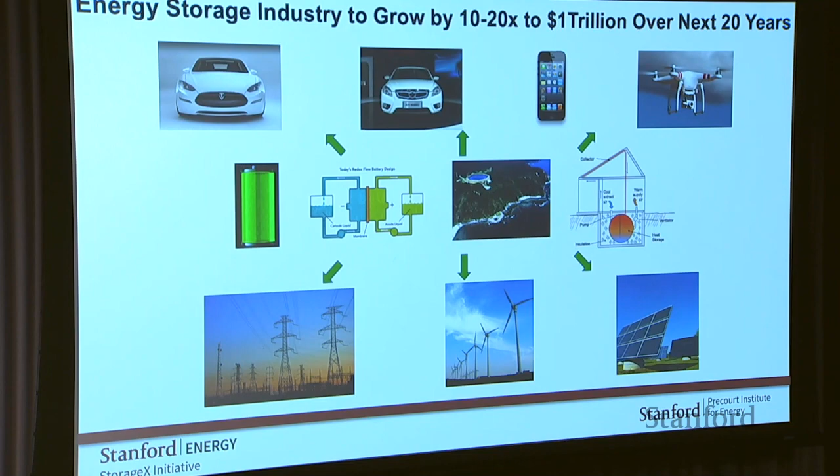And I think the audience hopefully does not require an introduction to the urgency of the energy challenge, but perhaps what is not realized is that there is an enormous growth needed in the area of energy storage. So we're now reaching an era where renewable electricity can be generated that is competitive with conventional electricity, but it is not available all the time and everywhere that is needed. To resolve this issue, you have to tackle storage.

The application of energy storage goes far beyond that of the electricity grid. It goes into transportation, and it goes far beyond that of just conventional automobile transportation, but into electric flights and other exciting applications. And this slide is just to show you all the possible use cases that can be enabled by affordable energy storage.

There are many form factors of energy storage. We won't get into too much detail today. There are small batteries, there are big batteries, there are energy storage options beyond battery. And this is really the X in StorageX, is to look at all possible scenarios that will get us to an energy storage option that can make a decarbonized energy system competitive.

Unless you've been living under a rock, maybe some of you have, you would have heard that the Nobel Prize in Chemistry last year was awarded on the topic of lithium-ion batteries, awarded to John Goodenough, Stan Whittingham, and Akira Yoshino for their invention of the lithium-ion battery technology some 30 years ago. And this, in the word of the Nobel Prize Committee, is a gift to humanity. I think this is really not an understatement. If you look across this room, the number of lithium-ion batteries probably will be well in the hundreds. And our life today would not be possible without it.

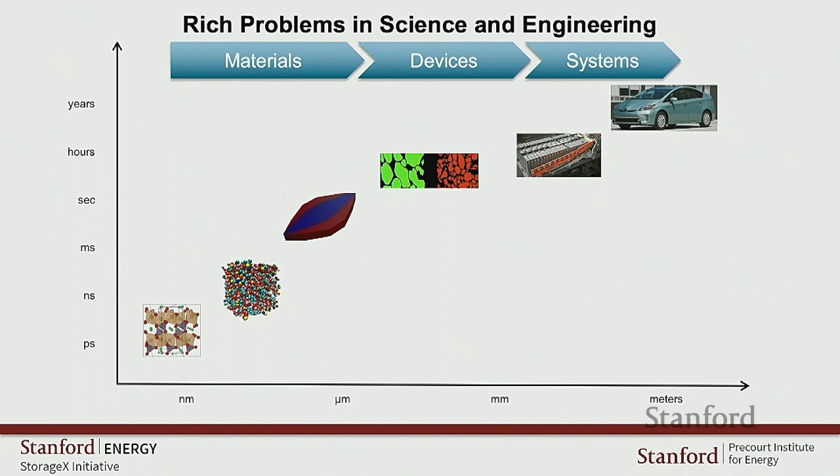We've been tackling this from the synthesis, the fabrication, the characterization, the modeling, the analytics. So this is giving us the ability to look at the problem more holistically. And this is really how the idea of the initiative came about. It was, well, how do we now take it to the next level to span the science and engineering from the materials to the devices and then ultimately to the systems level, whereby we can make the largest impact.

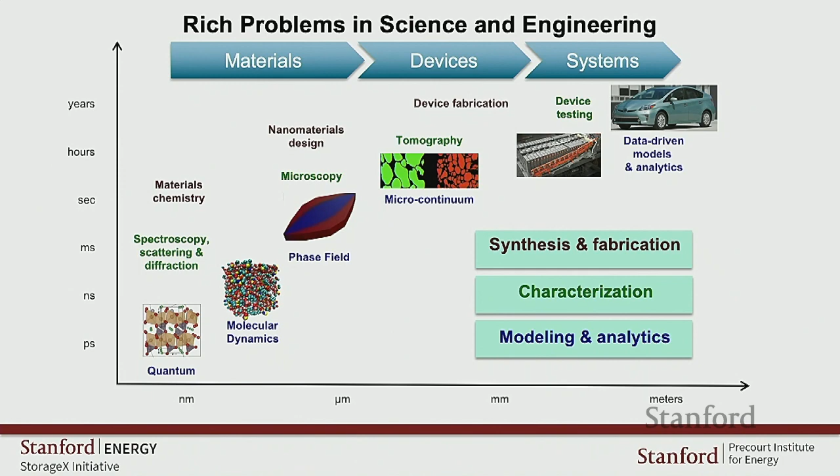And we already have a critical mass of people at Stanford. There are more than 20 faculty members involved in various aspects of energy storage, 150 students spanning many departments. You will find many of those faces right here in this room.

And I think it's worthwhile to just state the obvious. So why do we need this initiative? What is the purpose? I will tackle it from sort of the strategic sense, and then shortly after, I will tackle it from the pragmatic sense. So on the strategic level, the reason why we need an initiative organized around energy storage is because we recognize the importance of the problem. But also, in order to solve these issues, we have to do something bigger than what we have now.

We have to build very strong partnership between university, government, and industry, with industry being a significant emphasis. We want to continue to recruit the best talent to come to Stanford to work on energy storage. We want to be able to enhance the interaction between faculty members already at Stanford. There are many people working in an isolated fashion, but there is an opportunity to bring everyone together. And then lastly, we want to be able to go beyond what we can do as individual principal investigators, do something bigger to build translational facilities and multi-PI labs so we can do bigger things.

It's my pleasure to introduce the people behind the initiative. Of course, you'd have met my colleague Yi from the Material Science Department, but we also involve many other faculty members as well. Simona Onori in Energy Resource Engineering, Fu-Kuo Chang in Aeroastro, and various other members of the Precourt Institute have been involved to get this off the ground. As I mentioned, the symposium that launched this effort was just a little less than 2 months ago.

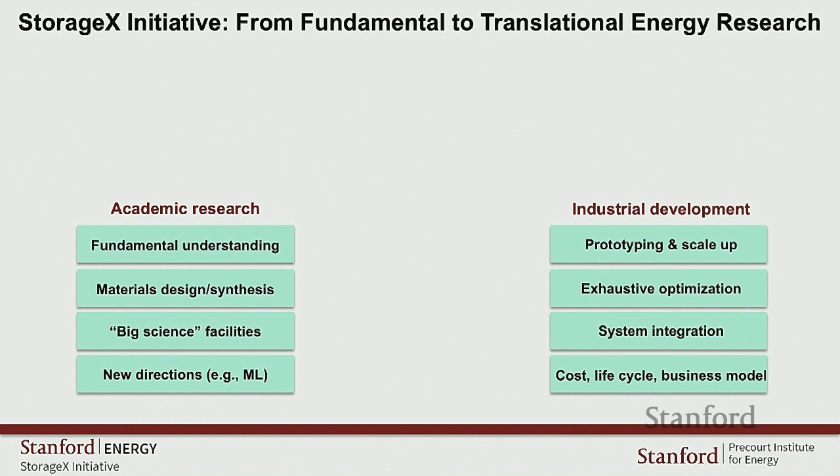And what we're trying to do in this initiative is to empower the people at Stanford, the faculty, the staff, the students, the postdocs, and to get the best of both sides. In a pre-competitive setting, we're not trying to compete with industry, but we're trying to take what we do best in the academic setting, and siphon elements from industry development in a pre-competitive setting so we can merge them. And the main outcome that we hope to have is to de-risk the technology for scaling up and commercialization, to be able to take something that we have, say, invented or discovered here at Stanford and be able to turn it into a reality.

So now you have a general sense of our guiding principles and the strategy. Let me now show you a couple of highlights of what we have been doing so far. This is pre-StorageX. And then I will show you a couple of case studies of how we can expand and integrate. And then Yi will show you additional examples from his research that ties everything together.

So in terms of fundamental understanding, as I mentioned, this is one of our key pillars. We're really good at understanding the detailed mechanisms of things. For example, on the left here, these are the first atomic resolution images of lithium metal, which is a very promising material for high energy battery that could be 10 times of the energy density it is today. This is from Yi's group. And this is also the first atomic scale image of the passivation layer that protects the lithium metal from further corrosion.

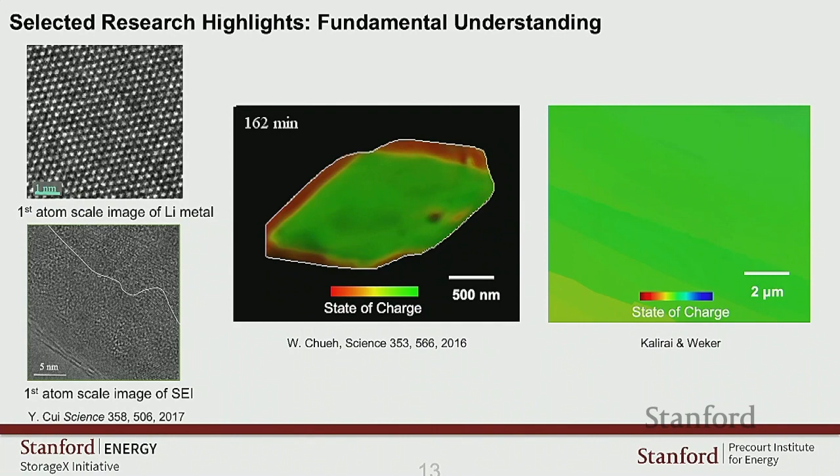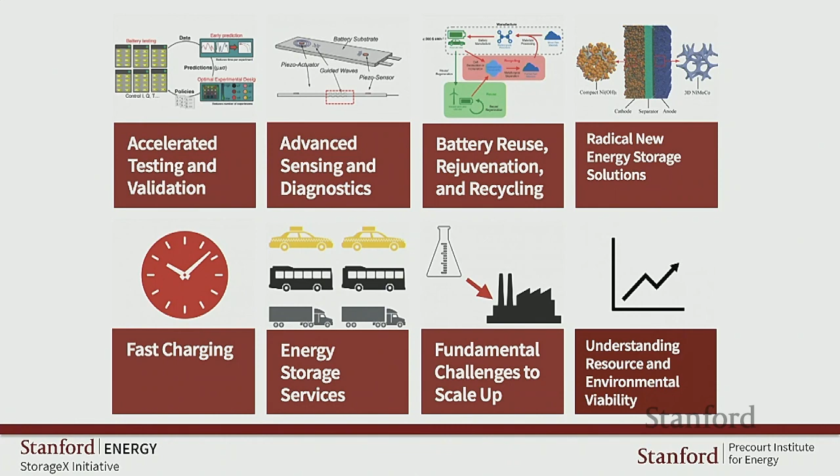Now, trying to glue everything together, we at StorageX identified several cross-cutting topics. These are topics which don't have just one, but several components. For example, accelerated testing and validation, advanced sensing and diagnostics, battery reuse, I already talked about, fast charging, so on and so forth, even looking at resource availability. These are the 8 core topics of StorageX that we're trying to engage our industrial partners and also our colleagues to address. I will give you 2 quick examples of how integrated these problems are.

So this photo here shows you an electric car taxi driver in China that is waiting for their car to be charged. So these are downtime and time that they're not generating revenue. So one solution to this is to make battery charging faster. Today, the battery charging time to maybe 50 or 60% can be as little as 45 minutes, but to charge it to 80%, it will take about an hour and a half.

So this is about 10 times to 20 times longer than the refueling time of a gasoline car. If you think about the amount of power that is required for charging, we're talking roughly, if you have a 100 kilowatt hour battery pack, you want to charge it in 5 minutes, which is roughly the refueling time. You're talking about 1.2 megawatt, and that is roughly 1% of a Boeing 737 taking off. Well, not the MAX right now, but just the regular 737.

And if you look at the entire flow of energy, you have to go from the grid, where the electricity is being supplied from, to the charging station, to the vehicle, to the battery pack that's in the car, to the individual battery cell that's in the battery pack, and then you have to get it to the material that does the ultimate heavy lifting. So you have to manage this flow of 1.2 megawatt across this, times however many cars are charging simultaneously. And the type of problems are quite significant.

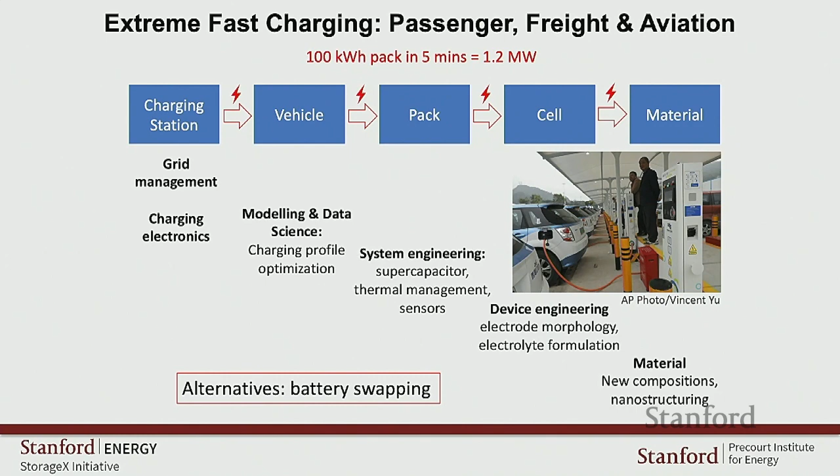I mentioned recycling already, and this is one aspect that is extremely important that we are tackling. We call it battery reuse, recycling, and regeneration, looking at the 3 possible cases of what you do with the battery when it comes out of service from its primary application. So for example, the first life use could be electric vehicle. After you have reached the end of life, so this could be 80% of its initial performance, 70% depending on which car manufacturer it is, you have a decision to make.

You have to think about, do I recycle it? Do I boil it down to the raw material and get the expensive things out? Do I repurpose it for something else? That's called reuse. That could be, for example, for incorporation into larger systems like storage for wind and solar. And we can also think about later use as well beyond that. So what are the issues involved here?

We believe at the heart of this is a performance and valuation model. So at every decision point, we're trying to assess how much each one of these options is going to bring value to the user. So for example, at the end of use for the car battery, is it worth $10, $100, $1,000, $10,000? We actually don't know very well because depending on the next application, the valuation can change. So we're taking a very comprehensive systems approach here to look at, for example, the data behind it. So can we make predictions about how the battery will perform in its next cycle, next use?

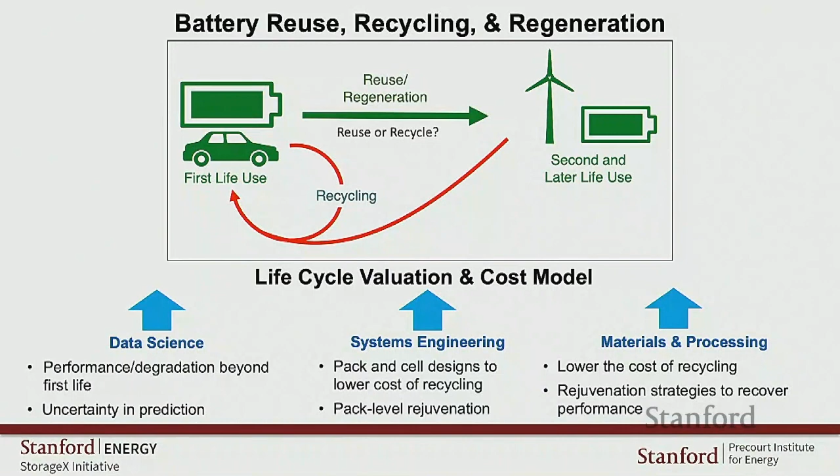So, well, thank you. This is a very, very nice overview of StorageX. I think in the next 20 minutes or so, let me use one example to show you our learning curve. And from the learning curve, we want to do better inside StorageX. But let me reveal one information first.

I look back when Stan Whittingham won the Nobel Prize, I say, oh my God, the first paper he published leading to his Nobel winning award was published in 1976. That was the year I was born. It took really a long time to get there. Right? John just turned 97 years old this year, 97. Lithium made people live longer. That's good news. But lithium battery is actually very, very challenging. You better live very long in order to achieve something.

So '76, intercalation mechanism, and Stan's science paper. That's 1976. And in '91, that was the first commercialization product of lithium-ion batteries. So that's roughly about 15 years. That's the type of cycle you should expect. 15, 20 years for hardcore materials technology, from initial invention to commercialization.

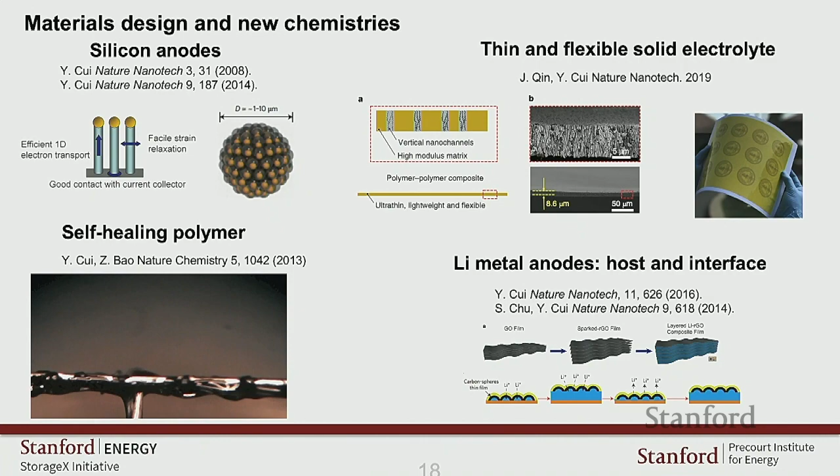For example, this is a needle, trying to punch through this polymer, but it's so resilient, this needle cannot go through. We want to use this type of polymer to prevent lithium dendrite formation to enable metallic lithium. This is the type of chemistry, the new material we want to enable. It's very challenging. However, if you could do that, this is the pathway you can get to, right?

We are roughly somewhere around 250, a little bit higher than that right now, watt-hours per kilogram of energy density per unit weight. Can we go to 400, 500 and more? Then you can enable the possibility of 500 miles driving range. But there's a lot of problems right there we need to solve.

I want to share with you the story, from a decade ago until now. What do we learn? How can we do better in the future to let academia and industry work together to speed up this process? The example I want to share with you is silicon. Coming back to silicon, I'm still working on these materials. It's been more than a decade.

But silicon is a candidate that can replace graphite, carbon, as the anode of the batteries. It has a capacity that's about 11 times that of graphite. And imagine if you can put silicon into your batteries, it can boost up the amount of energy it can store because it stores a lot more charges, a lot more lithium for a given weight.

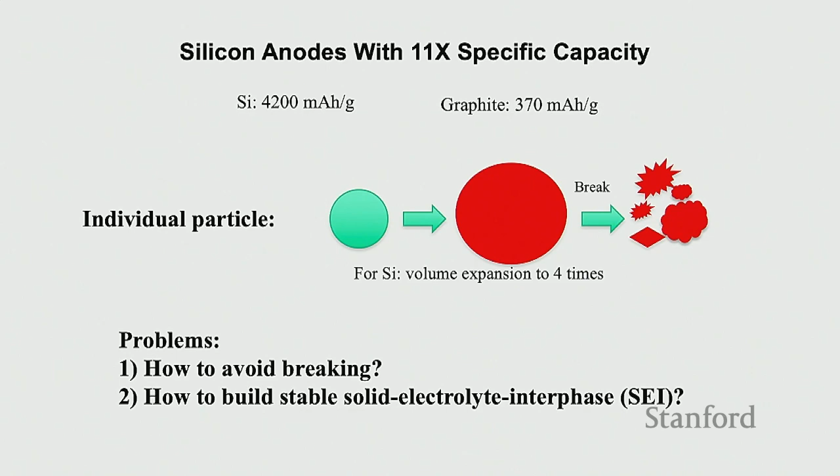However, the volume expansion is very big. When silicon expands, it can break. And also, the interface is not stable. So these are really, really challenging problems. Not knowing how challenging that is, about 11, 12 years ago, I started to work on it, published the first paper. And that only started all this learning of how challenging the batteries could be.

At the time we didn't know. I only knew, well, I can solve one problem. Let's go and do this little by little, just keep learning. It's actually very, very hard. So back in 2008, I published this first paper using silicon nanowires, thinking nanostructures are small enough that they could solve the expansion and breaking problems. Actually, it did. It solved the breaking problems.

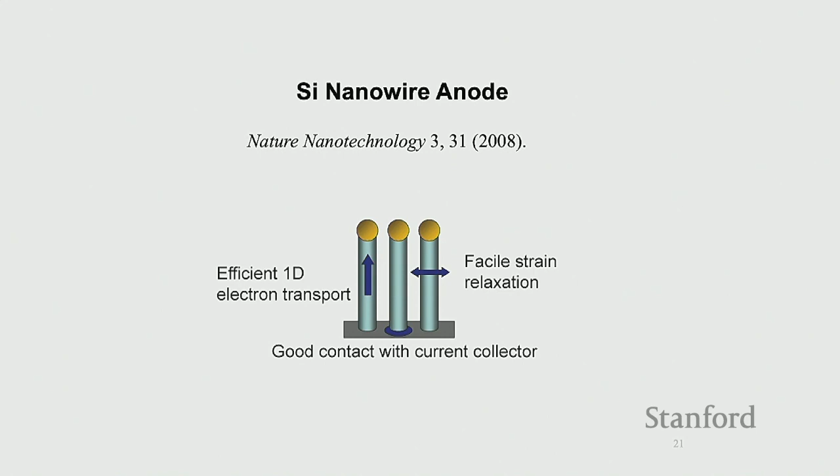Let me share with you this in-situ video inside a TEM. This particle in the center right there is 800 nanometers in diameter. Now I'm charging lithium going into this particle. You see the volume expansion is taking place.

These particles are shaking because you zoom in so much, the magnification is very big, and the vibration will show up inside the transmission electron microscope. And pretty soon you're going to see this particle is broken. Because lithium is coming in, this particle keeps eating up a lot of lithium. This silicon doesn't know this particle is already full, it just keeps eating it. So at the end, what happened?

It falls into pieces. So, using nanotechnology, we showed this could be solved by making the structure smaller so they do not break, they do not accumulate too big of a stress to be broken. We identified the critical breaking size. This highlights the value of fundamental research in university. Once you know this critical breaking size, you know what size of particle you need to use to build a battery electrode so they don't break anymore.

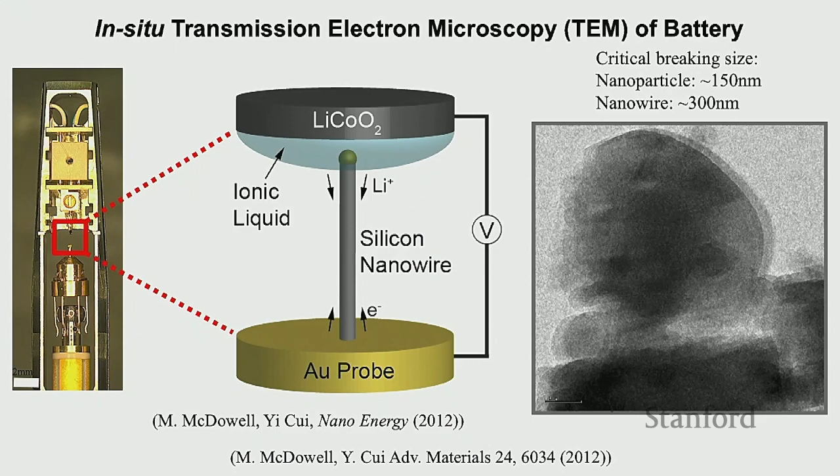This turned out to be guiding the industry now. All the battery companies try to say, well, what's the particle size they need to use? Basically, those are the particle size, 150 nanometers or smaller. For the nanowires, about 300 nanometers or smaller. So this learning keeps going. Along this process, we identify so many problems we have to solve. It's endless.

Well, luckily, this is also the process. That's why we need government. We need university, government, and industry working together. There's a different perspective if you're working at different segments of the problems; the earlier you know, the better. That's number one, the value. Because industry tries to optimize and deliver their batteries to you, they can see all the problems once they deliver a real product. If you know those problems coming back, you can speed up the innovation.

And also, not only that, from the funding support standpoint, we need continuous support. We know the funding cycle for government is usually 3 years. If you can harvest the funding support from the Stanford side, GCEP is a great example, funding some of this early research, later picked up by Saudi Arabia, the KAUST university award providing this funding, and later picked up by the Department of Energy. This actually provided support for about 10 years to continuously advance the understanding and come up with solutions.

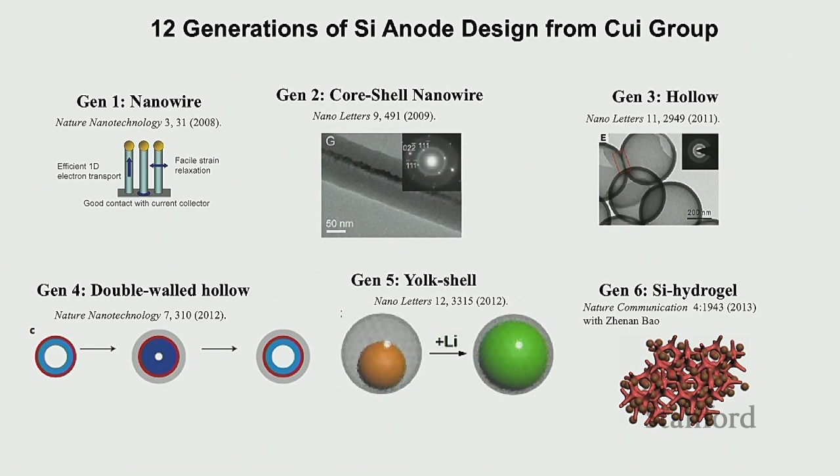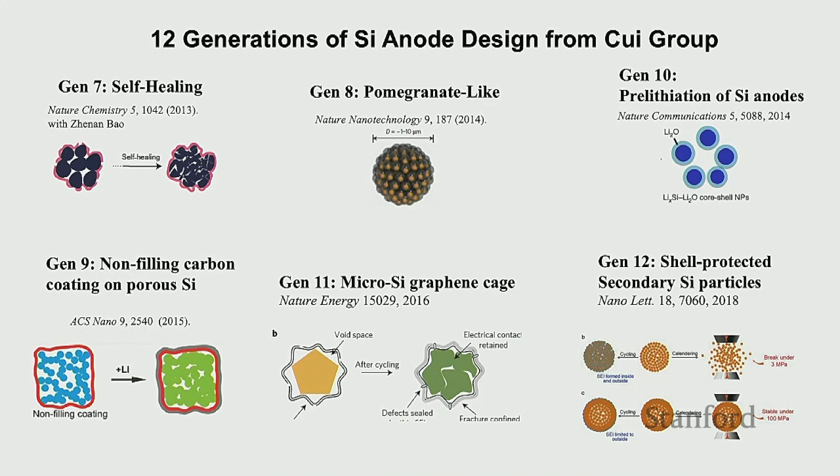Within StorageX, we want to have a support mechanism to really get some of the new ideas started and also get some of the really good ideas later picked up by the industry. So over the past more than 10 years, about 12 generations of design, I won't bother you about that. But this is on the university research side. But indeed, in order to make challenging materials like this go into the industry to be used, industry needs to pick up.

So in 2008, I didn't know how challenging a battery technology could be. I started our company called Amprius. I was thinking, on average, it can take 15 or 20 years to commercialize a technology. Maybe at Stanford right here, we'll be a little bit smarter. We can make it 7, 8 years. But I was completely wrong. Looking right now, in 2008 I founded Amprius, the technology was invented in 2007. Today, this year, 2020, 13 years now. So I'm about hitting the 15 years mark. It actually took a very long time to get there, and also a lot of money as well.

Well, let me share with you. So after the Stanford research, what happened? Amprius has a very dedicated team to develop the manufacturing technology to make those wires. If you visit my lab, how we make silicon nanowires is a tube furnace like this big. A quartz tube, 1 inch diameter, making a coupon size. The silicon nanowire material, we build coin cells, we publish a Nature Nano paper. It's actually very easy compared to industry.

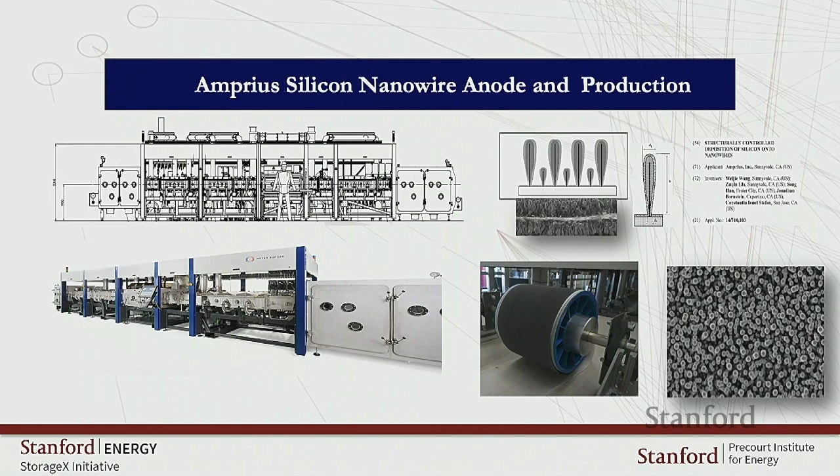So over the past decade, this was validated slowly until now you are seeing those really big rolls, the black color of silicon nanowires growing on the metallic foil. This is also the opportunity to innovate in the whole manufacturing scale-up. Within StorageX, we talk about taking the idea to a scalable solution. How do you do that? And this might be one of the examples, I would say, right there.

Traditionally, how do you make a battery electrode? You take the particle, you mix a slurry, put in a polymer binder with solvent, you do the coating. After the coating, you do the calendering, you heat it up, and all this process is multi-step. Now, those multi-steps are gone. Just one step, foil in, foil out, making the whole electrode.

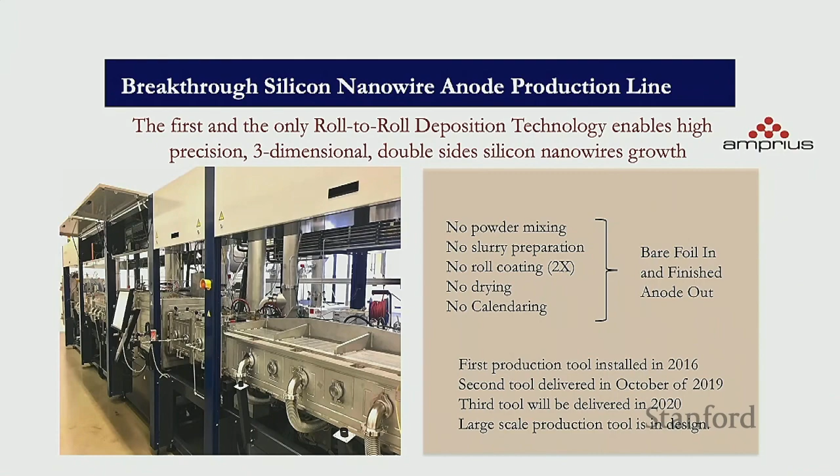But when you go to industry, you are not delivering milliamp hour per gram. You are delivering energy, watt-hour per kilo. Simply this unit change from milliamp hour per gram to watt-hour per kilo means a lot. You are doing something real. That also means there are probably 20, 30 big problems already solved. And I hope in university research we can see those problems earlier.

That's why building up this industry-university partnership is so important. There are some problems we don't see within university research, but those are actually perfect for university research to tackle. We can de-risk the technology in a pre-competitive sense and speed up the innovation.

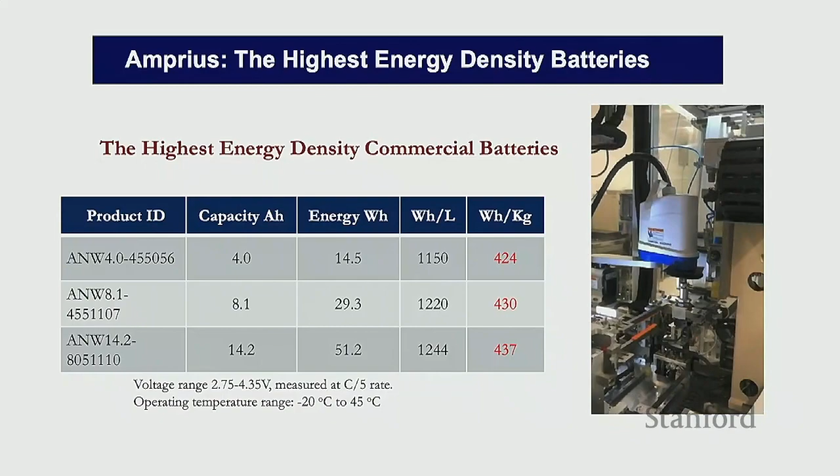I want to show you a video. In my lab, my graduate students do this by hand, right? Now let's look at this automatic silicon nanowire stacking line that I stole from the Amprius CEO, with his permission, to show. It can now roll this silicon nanowire roll to roll and stack it up layer by layer using an automatic machine. It's very slow at this moment. There's still a lot of hard work to make the manufacturing much faster. This has been delivered to Airbus, partnering with Airbus.

So silicon is an example of how we do materials innovation. The holy grail is really lithium metal right there. Lithium metal combined with sulfur, combined with other cathodes, gives much higher energy density. That's the holy grail. But there are huge problems there as well.

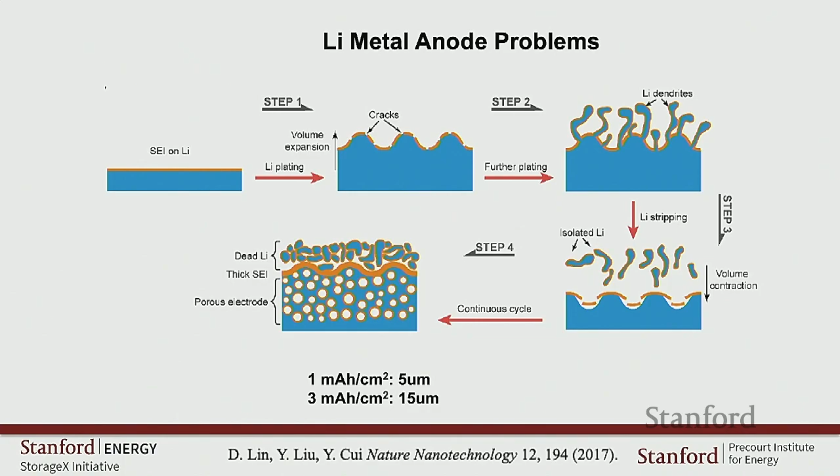Indeed, before the 1970s, in the 1960s, when people thought about lithium batteries, they didn't think about graphite, didn't think about intercalation. They wanted to use metallic lithium first as the anode. However, it failed. It's just too hard. Nobody knew how to solve the problem. We are running out of choices. After silicon, lithium metal will need to step in.

So many exciting problems to work on, almost impossible to solve. I think I still have the next 30 years to solve the problem. Will has more. He has 40 years. He's younger. So we'll work hard to address this problem.

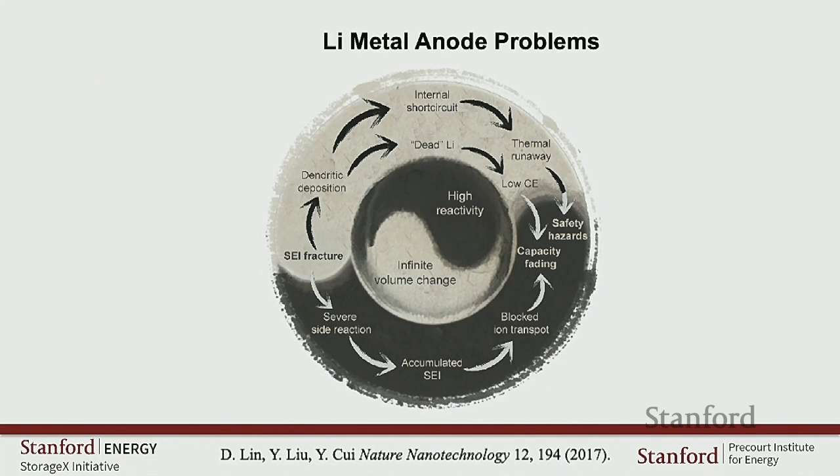So we have a team right here. This grand challenge is really exciting for bringing the team together. On the lithium metal anode side, after Steve came back to Stanford, Steve and I had a chat, and also a few other people. I said, what's the most exciting problem you want to solve? Steve said, lithium metal. I said, for me too, let's work together. So we work together and come up with new solutions. I won't go into the details.

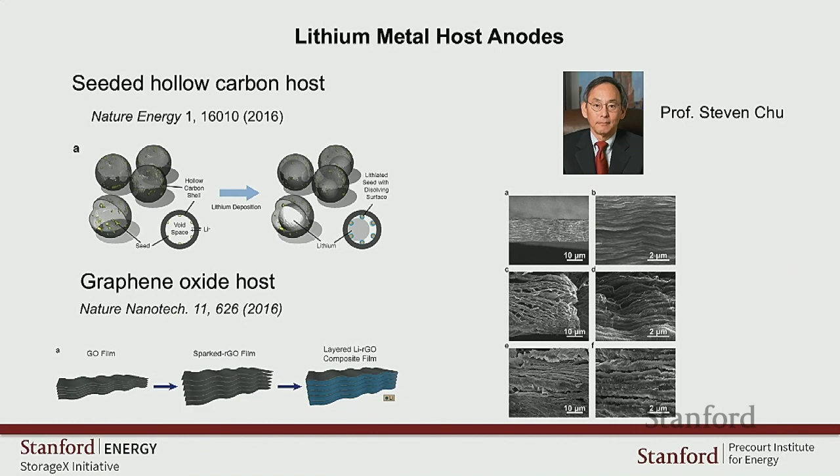And we also bring in the polymer expert, Zhenan Bao. Zhenan is a magician on polymers. All types of polymers are coming out. Their properties can help solve these problems.

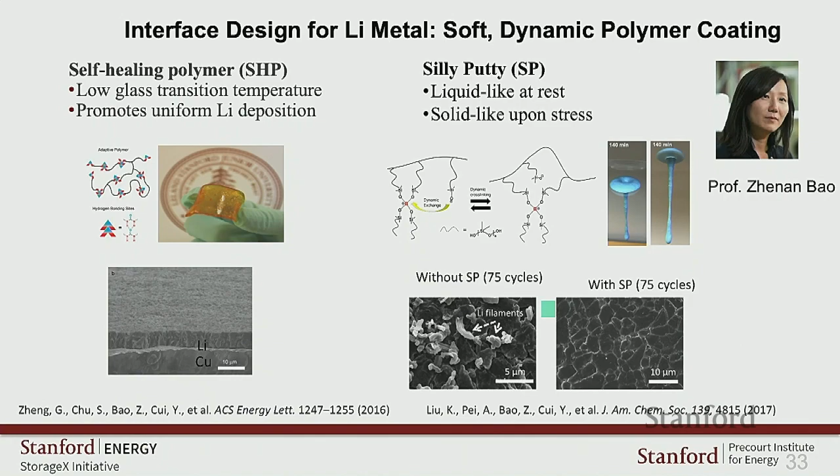So with this as an example, now let me zoom out a lot for StorageX and see the whole Stanford energy landscape, right? This has been planned since the GCEP time, Precourt. Now so many areas of energy come together, folded into the Precourt Institute. So we don't work in a vacuum. We work within a really large number of talented faculty and students. And storage is one part of the solution to very, very big problems.

This goes in parallel with other initiatives, such as the Natural Gas Initiative. We are learning quite a bit from the Natural Gas Initiative. How do we run StorageX? And we need to learn more because we were just born 2 months ago.

And also a very strong connection is with Bits & Watts. Storage is not only for cars, but also for the grid. This very strong partnership will allow us to guide the technology development and the whole system-level understanding. We told you about when you charge the car in 5 minutes, the 100 kilowatt-hour battery requires 1.2 million watts of power.

These batteries in the grid come hand in hand. And also, what's very important is the financing part. I was telling you about the funding support part. For each faculty, we know it is super important to keep stable support. Once you have a technology going out, you need to put it into the economic environment to see what more you need to solve. So the partnership with sustainable financing is very important, as well as with the industry.